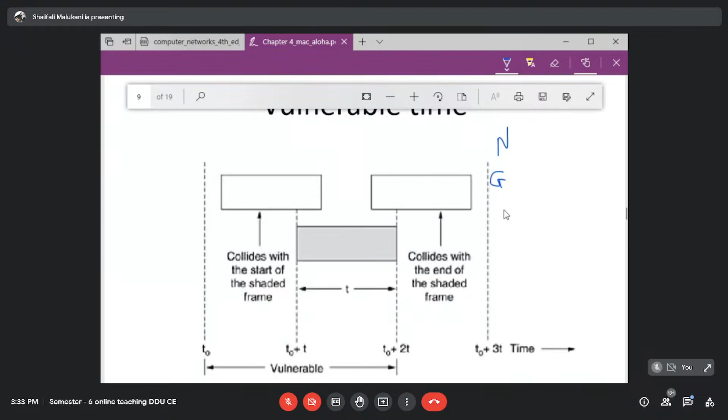So in which duration should no one start transmission? Whenever I am transmitting, at that time no one should start - that is my frame time. Plus, before my frame time, no one should have already been transmitting in the previous time slot. No one should have started transmission before. They can start transmission here so that they can complete here, but not before. After that point, no one else can start. That is what we have already discussed.

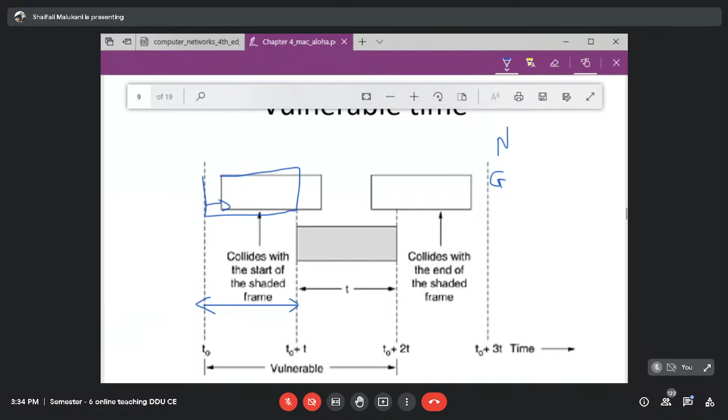So that is vulnerable time. What is vulnerable time? The time in which, if more than one frame is transmitted, they are subject to collision - they will collide. So that is vulnerable time. For my frame, it is 2 frame times. That is also what we have already discussed.

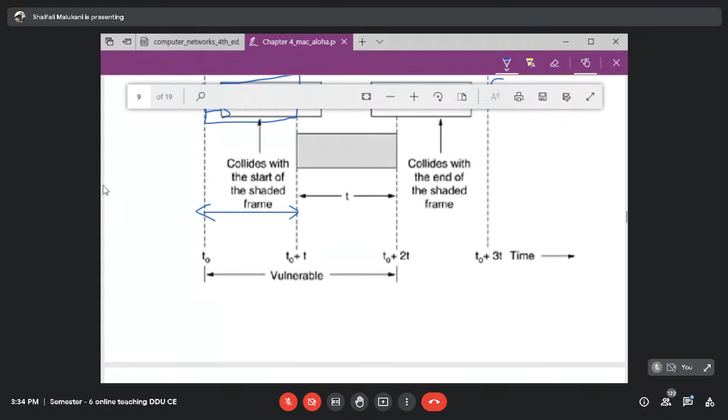We also discussed that we are going to follow Poisson's distribution. What is the meaning of Poisson's distribution? It gives the probability that k frames are generated. This is the distribution that will be followed. In general, this will indicate the mean number of frames that are generated, lambda. So the probability of generating lambda frames is the highest one, and if you take the area under the curve, you will get lambda as your mean. In short, lambda means that on an average, lambda frames per frame time are generated.

These are the frames that are in the network. So this is what we have already discussed, that Poisson's distribution is going to be followed.

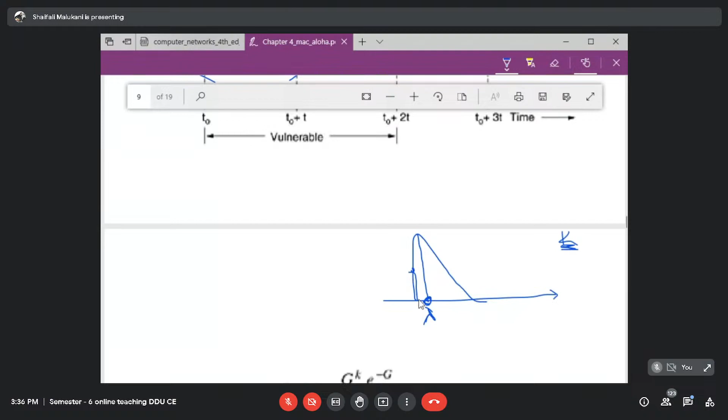So what if I'm taking k - what is the meaning of that? What is the probability that k frames are generated per frame time? So if I'm taking k somewhere here, this will give me Pk. Pk is the probability that k frames are generated per frame time.

Now I want to find out throughput. What is throughput? It is the probability of successfully reaching - the probability that my frame will reach successfully without any collision. That is what is known as throughput. So now what is the value of throughput here? How can you calculate the throughput?

So first of all, I want to find out throughput. Throughput is the number of frames or the amount of data that will reach the destination without collision. Is it clear? That is throughput - successfully, the amount of data that will reach the destination, that is throughput. Are you clear with the definition of throughput? Are you comfortable with the definition of throughput? What is throughput? The amount of data that will reach successfully at the destination. Is it clear?

Okay, so now throughput S is the amount of data that will reach successfully. So now what I need to find, what I need to do...

Suppose my data generated is G. What is the load generated? Load generated is G frames per second, and the probability that it will reach successfully into P success. What is the meaning of this? This much amount of data that is generated, into probability that generated data will reach successfully, so that is going to give me the throughput. This is generated load, and probability that generated load will reach successfully.

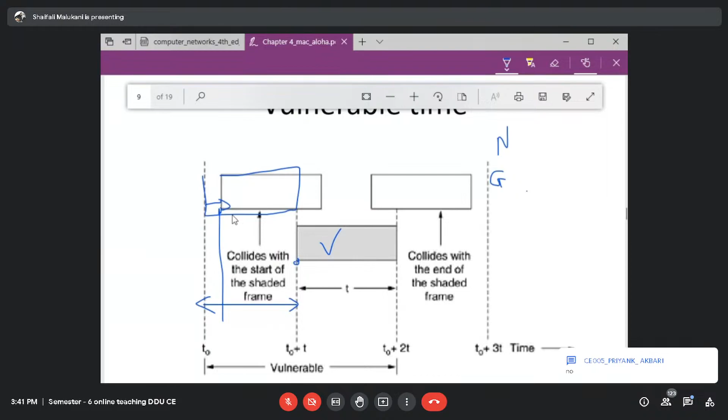Okay, suppose I have data to transmit, if someone starts transmitting at this moment, some frame is there, then can I ensure collision will not happen? So when can I say before my time there should not be any frame, and during my time there should not be any frame? Yes, in the vulnerable time, if there is no frame, that means it is ensured that my generated frame will reach successfully. After that, if someone generates, I will not mind at all, my frame will reach successfully. Are you getting the point?

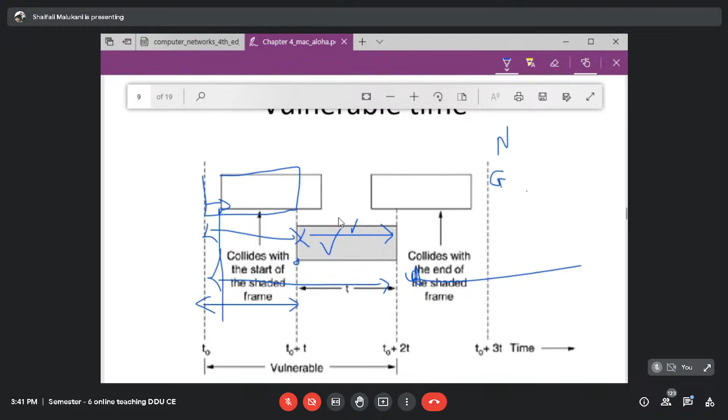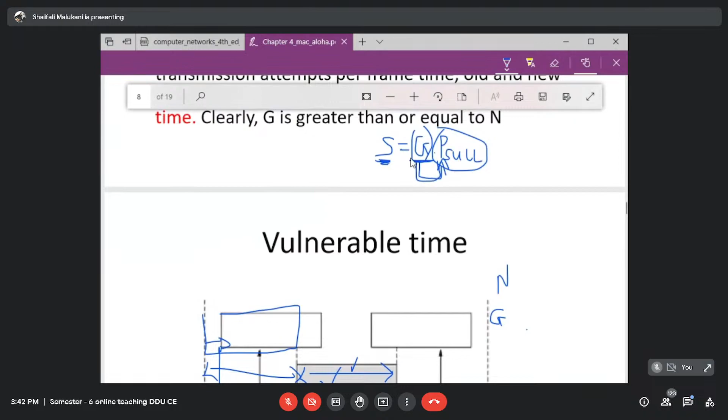After this, if someone generates, it is not going to create any trouble with my frame. But before that, if someone generates, I'm going to collide with them, or during my transmission, if someone generates, then it is going to create trouble. So what should happen? There should not be any frame generated in how much time? If I have a frame to transmit, then there should not be any frame generated, not even transmitted in the channel, there should not be any retransmission attempt even. So there should not be any frame in how much duration? In vulnerable time. What is vulnerable time? How much is the vulnerable time?

How much is the vulnerable time in pure Aloha? This is one frame time, and this is another frame time. So what is vulnerable time?

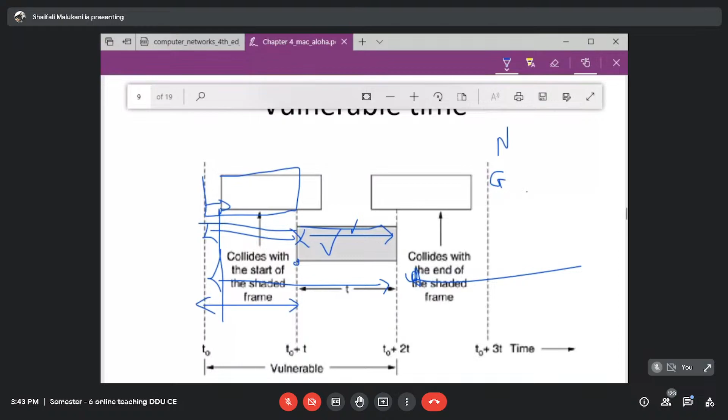So this will be 2 frame time. In 2 frame time, there should not be any frame.

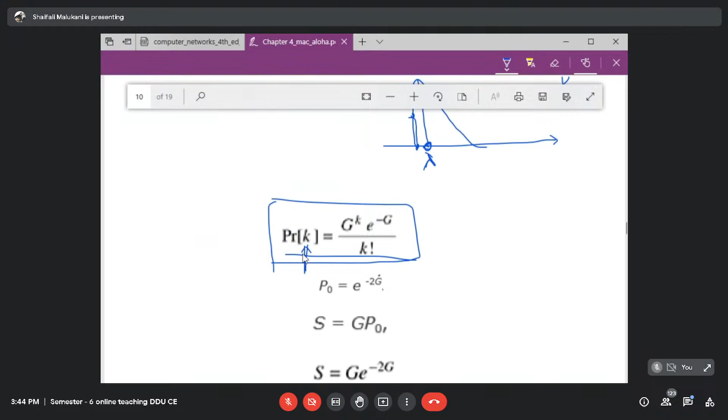So I need to find out what is the probability that no frame is generated in 2 frame time. Now, what I know is Poisson's distribution. What does Poisson's distribution say? What is the probability? I have the equation of probability of generating k frames in 1 frame time. This equation we are not going to prove, this is just Poisson's distribution.

We are not going to prove this, no need to prove it. This is just Poisson's distribution, like we have an equation for the Gaussian distribution. So what is the probability that k frames are generated in 1 frame time?

What is my question? So what is G here? What was G? Do you remember what was G? Total number of frames transmitted in 1 frame time. Absolutely, total number of sent frames, yes, but in how much time? In 1 frame time.

And suppose I am using, so total number of, not total number of, but average number of frames transmitted, average number of total frames transmitted. I hope you are getting it. That is the average value of total number of frames transmitted. Total indicates here new plus retransmissions, but in 1 frame time. And what I was getting here is the probability of transmitting k frames in 1 frame time.

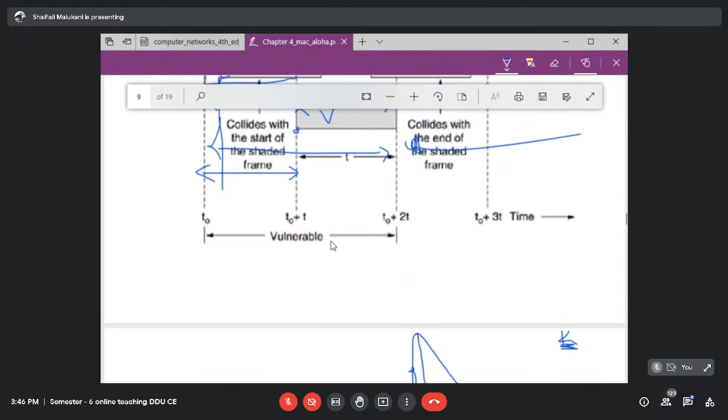So if I substitute k value 0, what I'm going to get is the probability of 0 frames generated, no frame generated, in 1 frame time. But I'm not interested in 1 frame time, I'm interested in 2 frame time. So I want to modify this equation for 2 frame time. In 1 frame time, if g is the average number of frames generated, then in 2 frame time, what will be the average number of frames generated? In 1 frame time, the average number of frames generated is g, so in 2 frame time, what is the average number of frames generated?

2g. Yes, it is going to be 2g. So this equation should be replaced with 2g. Wherever g is there, I'm going to replace with 2g. Then this will give me the probability of generation of k frames in 2 frame time. And then I want to find out k is equal to 0, that is probability of generation of 0 frames in 2 frame time. So can you tell me, substituting k=0 will lead to what value?

It will be 2g raised to k. It will not be like, right, it will be 2g raised to k. It will not be 2 into g raised to k. So what will it be?

2g raised to k. K will be 0. So what will happen to this? It will become 1. What will happen to this?

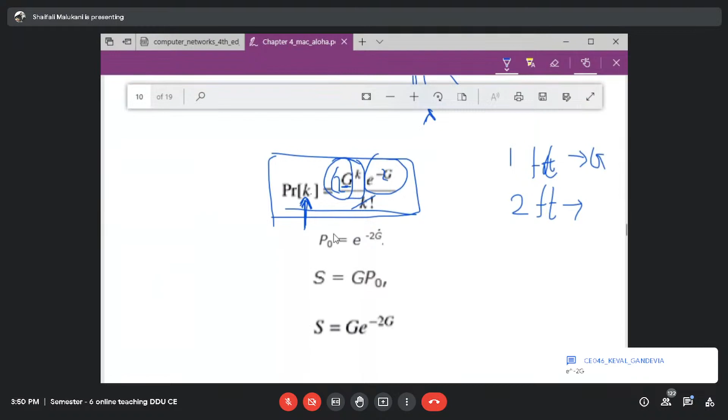Yes, e raised to minus 2g, right? And e raised to minus 2g, that will be substituted here. So what will be throughput?

What will be throughput if I am substituting this? Yes, it will be g into e raised to minus 2g. Okay.

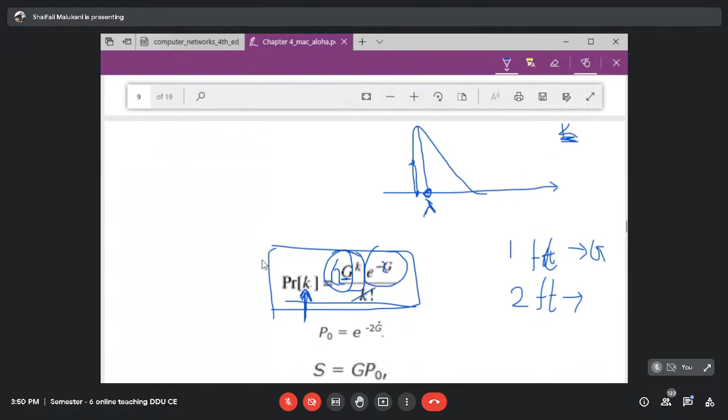And when do you think that throughput will be highest? What is the meaning of that? What should be the value of g for this equation? For which value of g do you think this will be quite high?

See, g is the number of frames generated per frame time. We know that in 2 frame time, if 1 frame is generated totally, whether it is new or retransmission, then I am going to get a collision free version. So throughput will be higher, right?

So someone will say, okay, but you can send it in 3 frame time, if 1 frame is generated, then also there will be no collision. But yes, efficiency will be lesser. So throughput will be comparatively lesser, because it will create less efficiency since you are wasting time there, right?

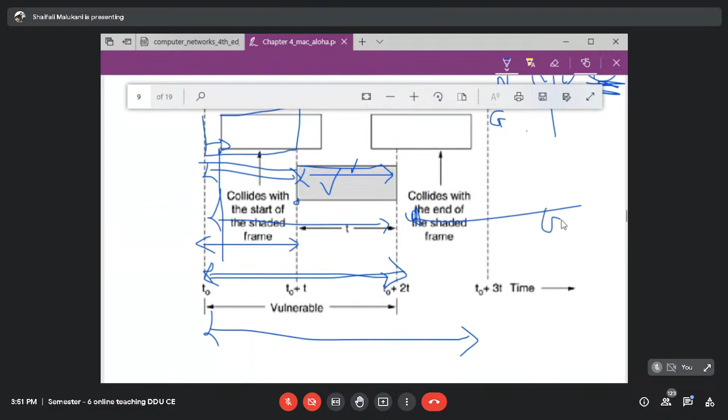So appropriately, when will you get the best throughput? For how many frames per frame time if generated, then you will get the best throughput?

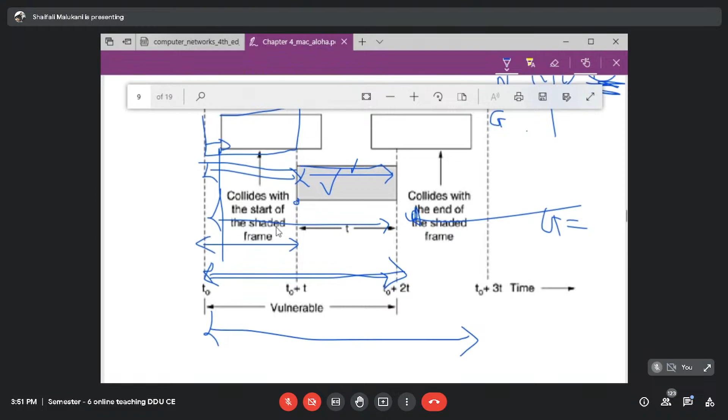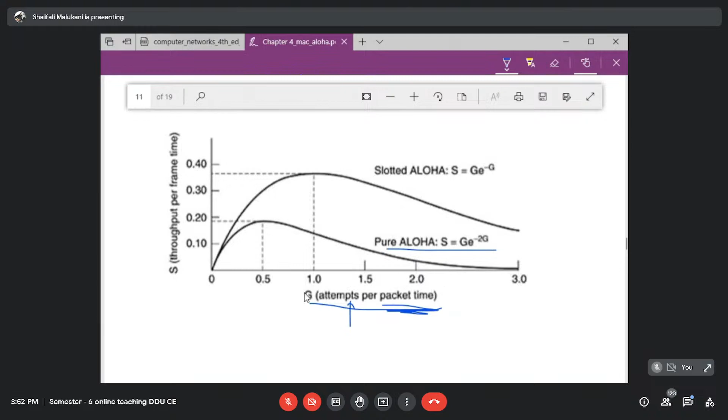Zero point 0.5, yes, it will be 0.5, and that is what can be seen. This is pure Aloha. This is number of packet attempts per packet time. Attempts means number of frames that you are transmitting per frame time, packet time, whatever you call it. So when g becomes 0.5, at that time you are having the highest throughput.

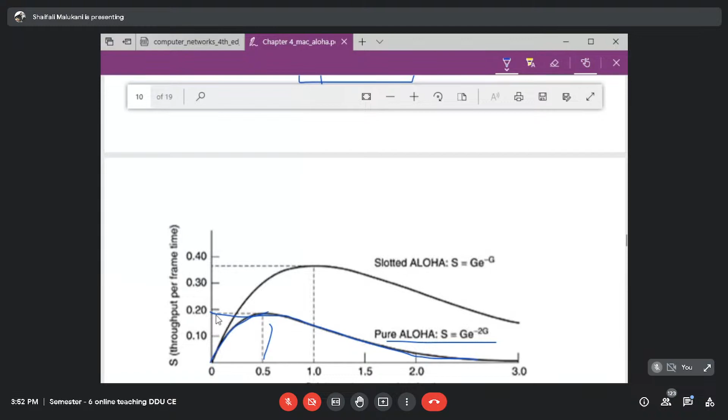And what is that? Well, then it is decreasing again, the reason we have already discussed. So what is the value of the highest throughput at that time? Substitute the value and give me the answer.

So I will substitute the values. What is the significance of having g equal to 0.5? What is the meaning of that? Substitute value of e and get the answer. Priyank, let me know what is the significance of having g value 0.5.

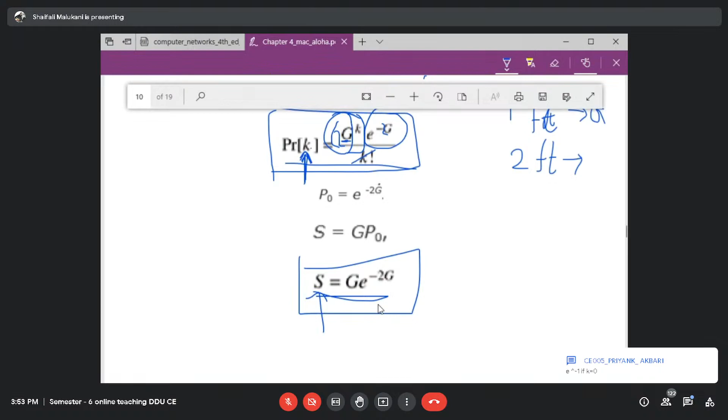What my question is to you: what is the significance of g is equal to 0.5? Meaning, I'm not asking e raised to minus 1 if k is equal to 0. Where are you stuck, Priyank? You can unmute yourself and ask me.

What is the significance of G having 0.5? That is what my question is to you. If you tell, then you will understand automatically. Tell me what is the meaning of G is equal to 0.5. What is the significance of having G value 0.5?

And I think no one is interested in answering what is the maximum throughput. See, I'm not interested if you are not able to answer me the questions.

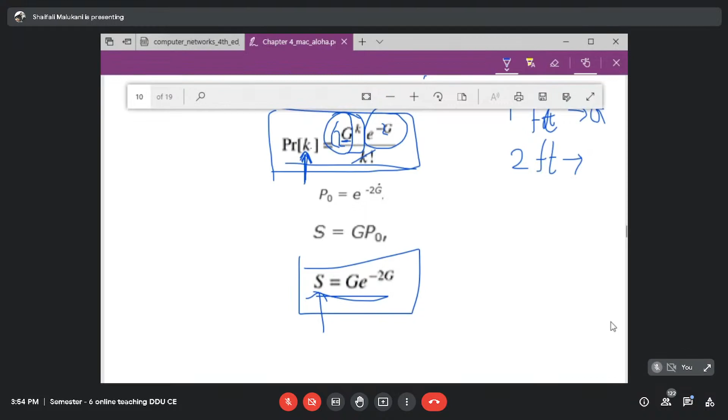And if we are having G value higher than that, that is more frame per frame time transmitted, will it be better? Higher value of G, like G is 1 or G is 2, will it be better? No. Can it be smaller? G be smaller, that means in 3 frame time or in 4 frame time you are transmitting 1 frame. Will it be better?

You are free here to transmit, right? You are free here to transmit, but you are not transmitting, so you are wasting the efficiency. It is not also better, na? It is not optimal, that is true.

Getting it, Priyank? Okay, and yes, answer is 0.184. So what is the meaning of that? Throughput is 0.184. How many percentage is the throughput?

Percentage wise, what is the mean? How many percentage? How many percentage is it? 18.4 percentage. So what is the meaning of that? 18.4 percentage of the frame reaches successfully without collision. So if I send 1,000 frames, 184 frames will reach successfully. That is the meaning. Only 18.4 traffic reaches successfully.

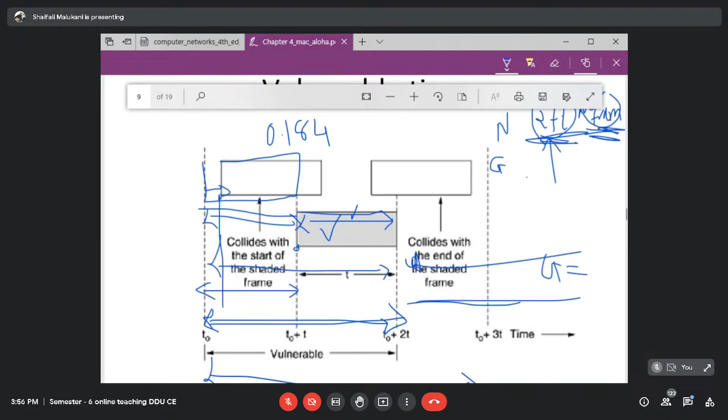So this is, okay, whatever it is. But of course, as soon as you are ready, you are transmitting. You are not having any other policy. This is the simplest aloha scheme that we had here, right? So that is the problem here. What is the problem? That your throughput is very less.

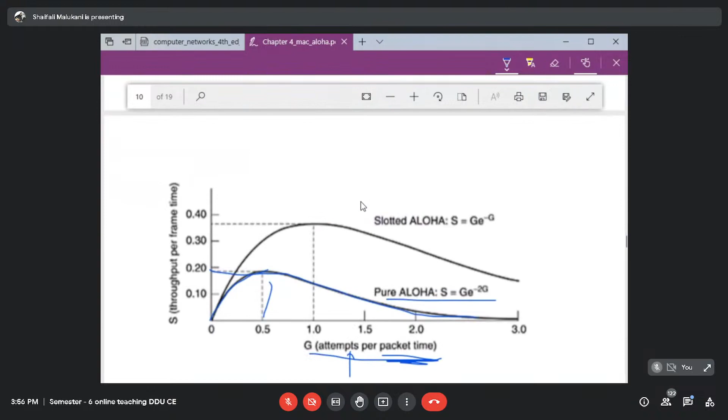We will come to this example, but I'm not sure whether the time will remain or not. So we will take that if time permits. Okay, now we are going to.

So this is what the Aloha was. As soon as I am ready, I will transmit. I will not take care about this time slot, it is a continuous slot. So as soon as I am ready, I will transmit. Okay, so this was the distribution of the frame. Anytime anyone can start.

But now next is the slotted Aloha, frames in slotted Aloha. So here what it is, that if I'm ready, I'm not going to transmit immediately. I will wait for the next slot.

Okay, so suppose this is the slot time. Let us take this as a slot time. So slot time is say 1, this is 2, then this is 3, and this is 4, and this is 5. So at time 1, if I am ready, then I can transmit.

If I become ready, suppose this machine becomes ready at this moment, right? In pure ALOHA, what was happening? It was free to transmit. Okay, but in slotted ALOHA, what will happen? Suppose I am ready at this moment, I cannot transmit. I have to wait for the next slot. My next slot will begin at 2. So this will start transmitting at next slot.

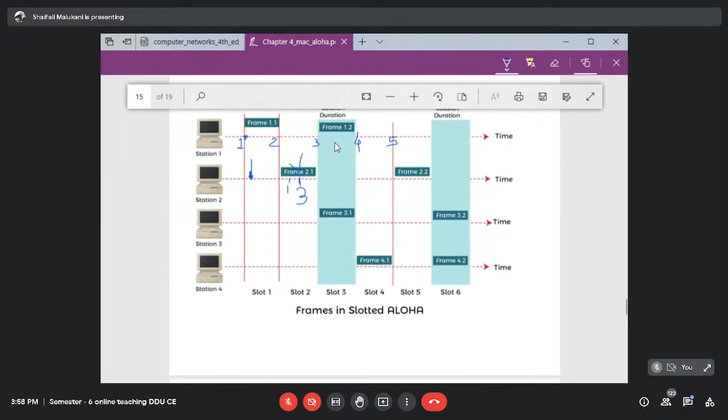I mean, we are not having anything here, we are not listening, we are not having any other policy, we are just waiting for a next slot. So what will happen here? Here it is successful because in my slot only one frame was there. This is successful because in my slot there was only one frame. Here what will happen? Collision will take place, here collision will take place. Okay, fine, now if collision happens, then what should station 1 and station 3 do?

If collision happens, should they retransmit immediately or wait? A random amount of time they will wait and then retransmit. Okay, true, so that is fine.

And so what will happen? Now can you tell me what is vulnerable time here? If in that duration no frame is there other than mine, then my frame will be successful.

Can you tell me what is vulnerable time for slotted Aloha? How it can be 0? What is one frame time? Yes, it will be one frame time. So what will happen in my frame: if in this duration no one transmits, then my frame will reach successfully, right? In one frame time there should be only my frame.

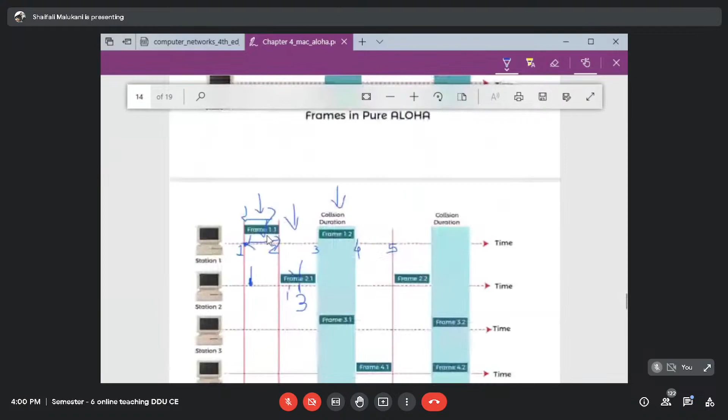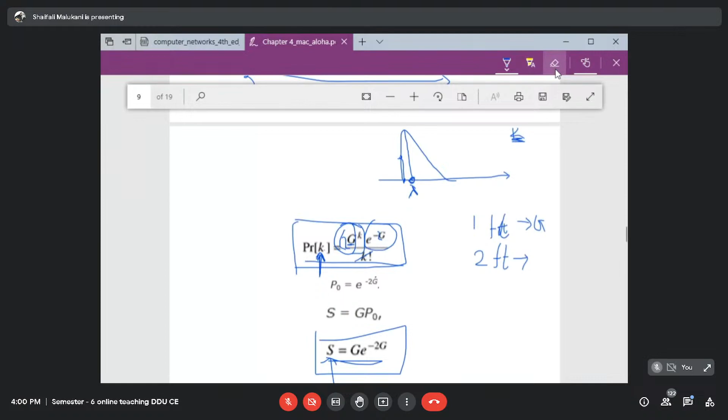So now let us do the same analysis here that we did. Again we are assuming Poisson's distribution, n and g value will be same, just the scheme is different. As soon as you are ready, you will not transmit, you will wait for the next slot. So now I want to find out throughput: s is equal to g into p success.

So what will be p success? How, when will I be successful? If there will be no frame, in how much time? In how much time there should be no frame? Then my frame will be successful? Yes, it will be one frame time.

One frame time. So what is the value of k, and what should I change the value of g here? Should I replace it with 2g? Do I need to change this equation with 2g? No, right? And what should be the value of k then? Because I want to find out for one frame time, this already gives me the equation of probability of generating k frames in one frame time. So I don't need to modify this equation, just I have to substitute k value 0.

Yes, substitute k value 0. What will be the final answer? What is probability of success? Substitute k 0. Yes, it is e raised to minus g.

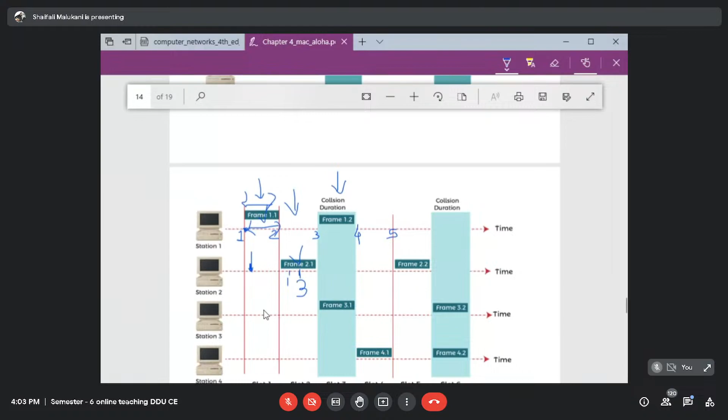What is g? G is, in one frame time, the number of frames generated in one frame time. In Aloha, what happened? In Aloha, in two frame time, there should be only one frame generated. But in this situation, in one frame time, only one frame should be generated. So g value should be 1 for the maximum, to satisfy the vulnerable time condition, and hence to obtain the highest throughput. So g value 1 will give you the highest throughput.

And what is the value of that throughput? 0.37, or you can say 36.8 percentage. Can you see the double throughput here? 36.8 percentage of throughput. So if I'm transmitting 1000 frames, then 368 frames will reach successfully. Okay, that is what the throughput is.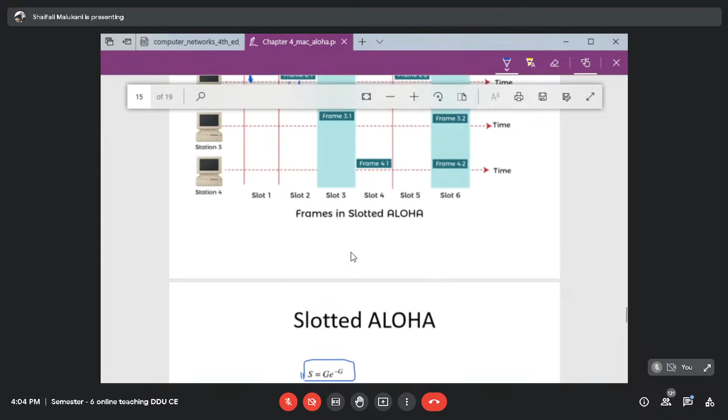One more point is given here: what is the probability that I will be successful in the kth attempt? Find the probability of success in kth attempt. You want to find out that you will be successful after the kth attempt.

What it will be? So when you are successful in the kth attempt, can I say you are unsuccessful in the k minus 1 attempt? So you were unsuccessful for the first attempt, then second attempt, then you reached the k minus 1 attempt, and in the kth attempt you were successful. So what you have to find out, if you want to find the probability of being successful in the kth attempt, that means you have to find out what is...

So now, okay, we will go to this, but can you tell me what is the probability of success here, and what is the probability of being unsuccessful? When will you be successful? We just calculated it. What is the probability of success? What you calculated for Aloha? What was the probability of success? Yes, it was e raised to minus g. So can you tell me what is the probability of being unsuccessful?

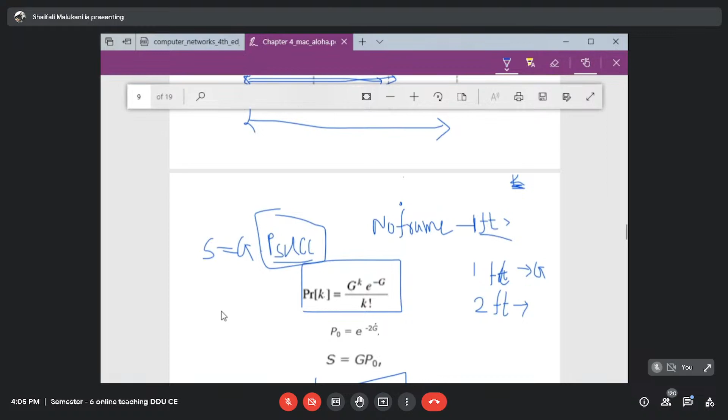What is the probability of being unsuccessful if this is the probability of being successful? Yes, it will be 1 minus e raised to minus g, which is the probability of being unsuccessful.

Suppose you are successful in the third attempt. That means you were unsuccessful in the first attempt, then unsuccessful in the second attempt, and third time you will be successful. So if you want to find the probability of being successful in the third attempt, you have to find the probability that you will be unsuccessful in the first attempt, unsuccessful in the second attempt, and successful in the third attempt. Yes or no?

So can you tell me what will be the equation if I want to find out the probability of being successful in the kth attempt?

Yes, it is going to be, if you are successful in the kth attempt, that means you were unsuccessful k minus 1 times. So you will have the probability of being unsuccessful k minus 1 times. Here you were unsuccessful 2 times, so you can write 1 minus e raised to minus g, squared, or for k minus 1, and into e raised to minus g. So you were successful in the kth attempt, okay, so this is what that probability is.

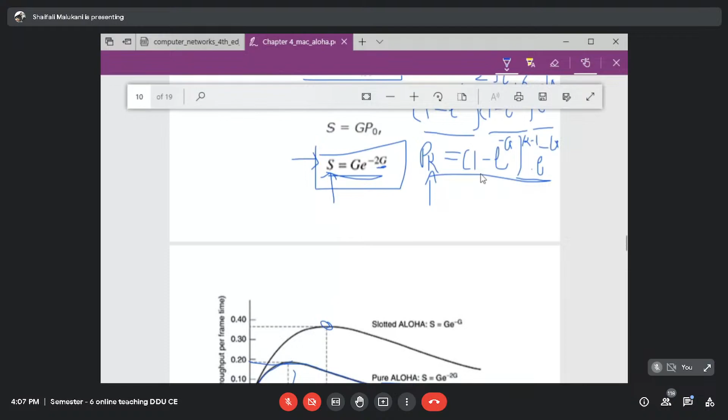Anyone having doubt up to this point? Anyone in case have doubt, please ask. Otherwise, I will go to the next point. Any doubt in this equation?

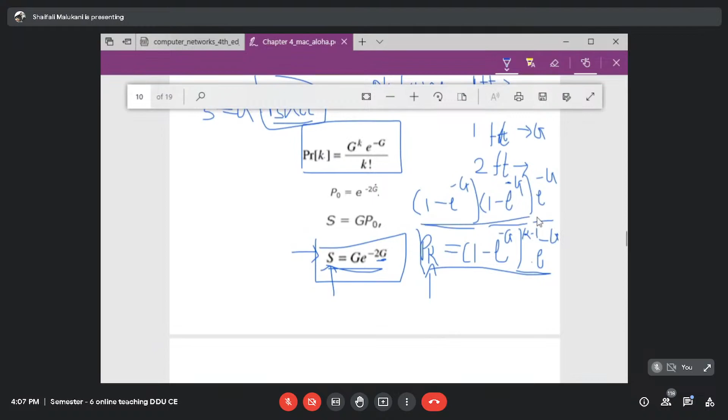And one more equation we should learn. Of course, proof is possible, we are not going to take it. That average number of attempts needed to transmit is e raised to g.

So on average, how many attempts will be required? Like here, you were successful in the kth attempt, right? So on an average, how many attempts does a station need before being successful? That is the expected number of retransmissions, or expected number of transmissions, the average number of transmissions it has to do for being successful, given by this equation.

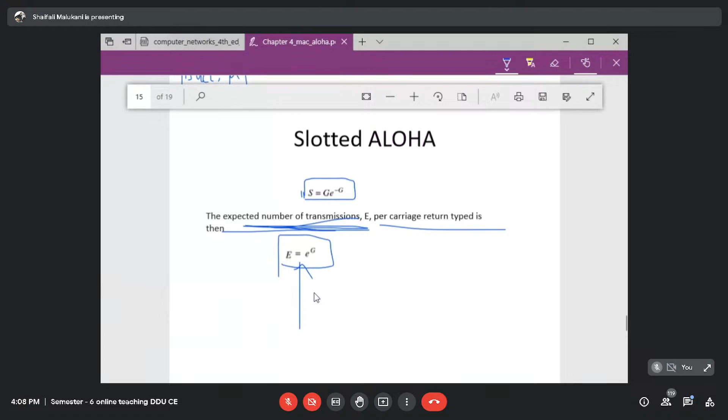So this is what we are not going to prove, it's not difficult, but time is a limitation, so we are not going to go with this. In the textbook it is given, you can explore and understand it. In case of doubt, you can contact me anytime, that's okay.

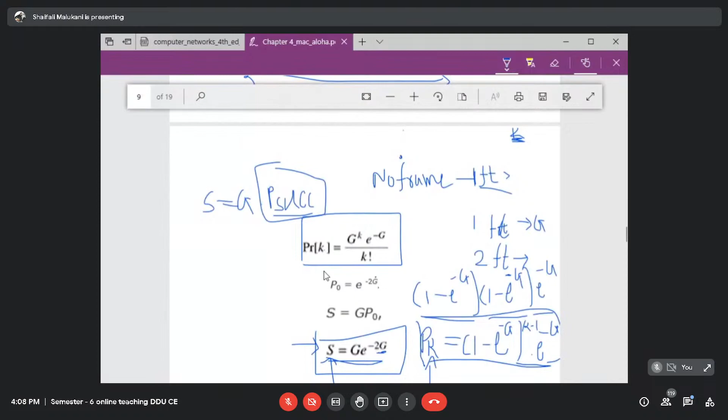Okay, so this is all about slotted ALOHA and ALOHA. Now we are going to take the examples. Any doubt in the concept? Then we can start with the examples.

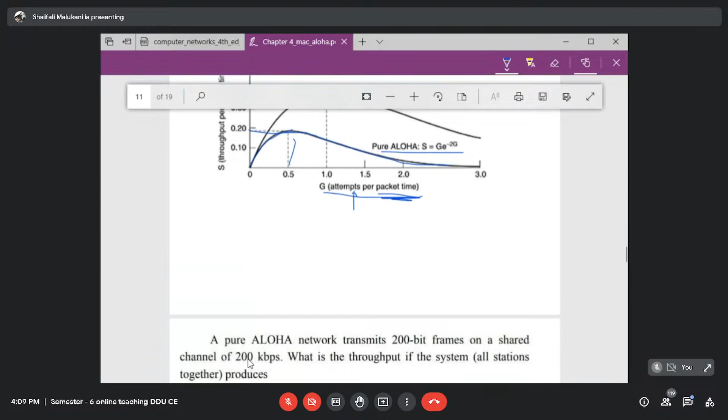Examples, you are going to do it quickly and let me know the quick answers, right? So the question is pure ALOHA, we are doing this example since years, but this was similar, just by changing these values. The question was asked in GATE 2021, right? This PPT, of course, we are following this question. This is given in the textbook itself, right?

So this question is from the book itself, but it was asked in GATE 2021 just by changing some values. So what is the point here, that you can understand the importance of this type of questions, right? Many others are there, you can just go through the ALOHA and slotted ALOHA questions and this multiple medium access control protocol questions. Not many questions are there, and they are very important for the GATE perspective.

Okay, so now tell me here, what is the question, what is given to you? A pure ALOHA network transmits 200 bit frames on a shared channel of 200 kbps. What is the throughput if the system produces?

What is the question to find out? What do you have to find out? Which entity will you find out, and what is the equation for that? S, you have to find out S. And what is the equation for S, for pure ALOHA?

Yes, it is G into e raised to minus 2g. So what is the unknown entity here? This is what I need to find out, right? What I don't know in this is G. So what is G? What was the definition of G? G, I need to find out. What is the definition of G?

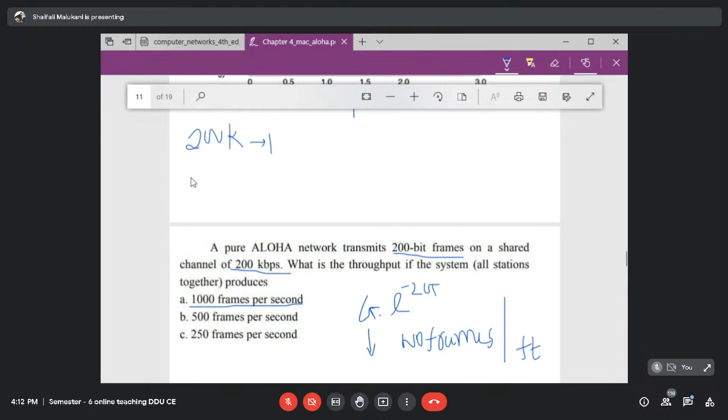Yes, the answer is correct here. So what is already given to us? Frame size is given as 200 bit. So what is given to me: in 1 second I can transmit 200 kilobits. So in how much time can I transmit 200 bits? That is going to give me the time taken to transmit 200 bits - that is one frame time.

Yes or no? So what will it be? Without units, won't it be scary? Amount of time taken to transmit a frame, that is 200 bit - I need to find out what that is.

Are you following this? Are you with me? It will be 1 millisecond. Yes, it will be 0.001 second, that is 1 millisecond. Correct.

So now one frame time is 1 millisecond. So what do I need to find out? Number of frames in 1 millisecond. What I have is number of frames in a second. Can I find out G for the first case? Tell me G for first, second, and third case quickly.

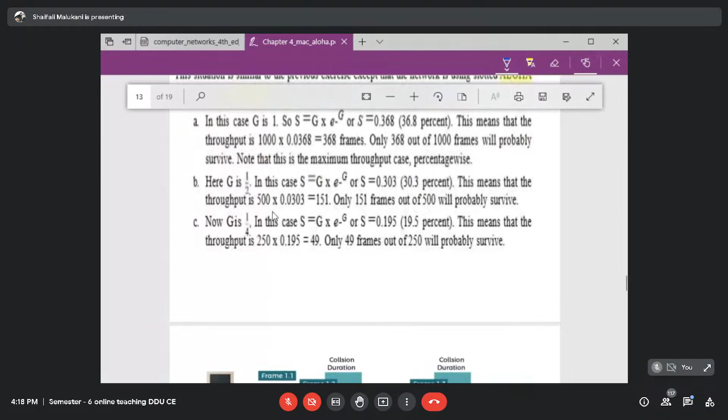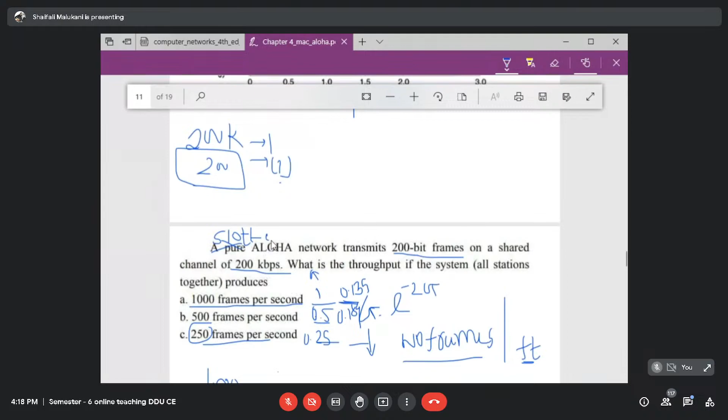This question I have written for the pure aloha solution. I will edit it. Tell me, what will it be for slotted aloha? Suppose it is slotted, change it to slotted. We are not going to do the entire example. For slotted, tell me what will be. Will there be any change in the answer?

So what will be the g value? Will g be same or different? Okay, what is g? Yes, it is number of frames per frame time. So g is going to be same for each.

What will be the difference here in the equation of throughput only, right? So here instead of e raised to minus 2g, you should use e raised to minus g, right? Otherwise g will be same. Logic wise it will remain same, just the equation here will get changed. Let us calculate for the first one.

What will it be for the first one? When g is 1, what will be throughput for g equal to 1 for slotted aloha? What will be the throughput? It is well known, no? G is equal to 1, what is the throughput, maximum throughput? What is that?

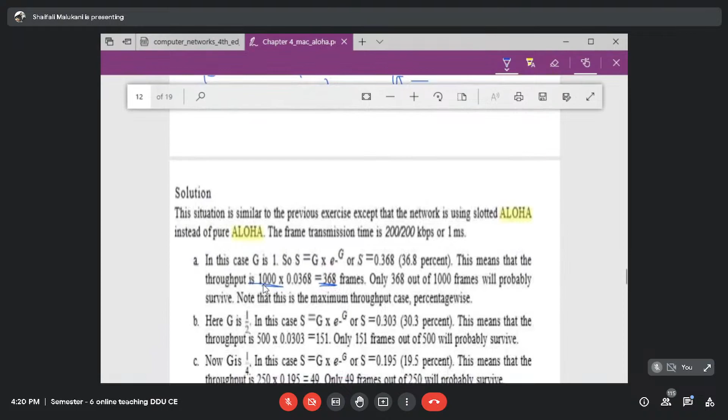Right, so that is what is given, 368 frames will reach out of 1000. But next time, whatever you get, your s value should get multiplied with 500, because the total number of frames transmitted is 500. I'm going to edit this question for both cases, you can calculate this for both slotted and pure. It is okay, right?

Now go for the next question. This is the next question. All right, this is the next question. Solution is not required, just go through the question. What are they asking? Which entity are they asking about?

So how many stations are there? How many terminals are competing with each other? What is n, how many stations are competing for the channel? 1,000 stations are there, and each station is generating how many requests on average per hour? 36. So per hour, totally how many requests are generated? One station only generates 36 requests, so yes, it will be 36,000 requests per hour generated.

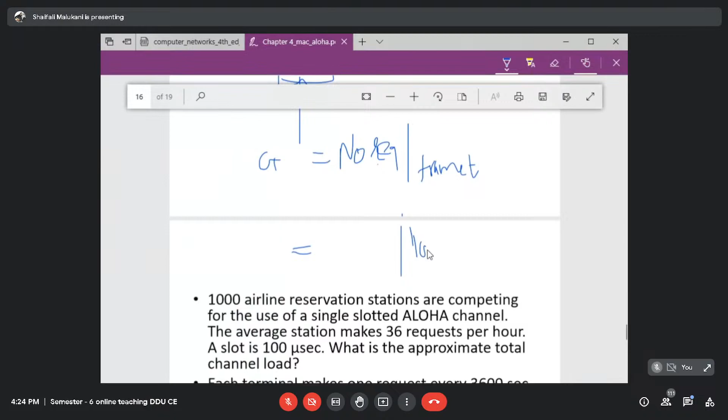So what we need to find out is how many requests per 100 microseconds. Are you clear that 100 microsecond will be my frame time? And what I have is 36,000 requests per hour. So I just need to do some conversions. This already I have, I need to convert it for this only. Do it quickly, let me know the answer, G.

36,000 requests per hour. No. G is 100, is that your point? No, 100 frames per 100 microsecond.

Then, I mean, throughput will be, on the ground, how can you send so many frames per frame time? Think, don't just calculate, see this is very simple. What do you need to do? Okay, tell me how many requests per second, Prince? How many requests per second?

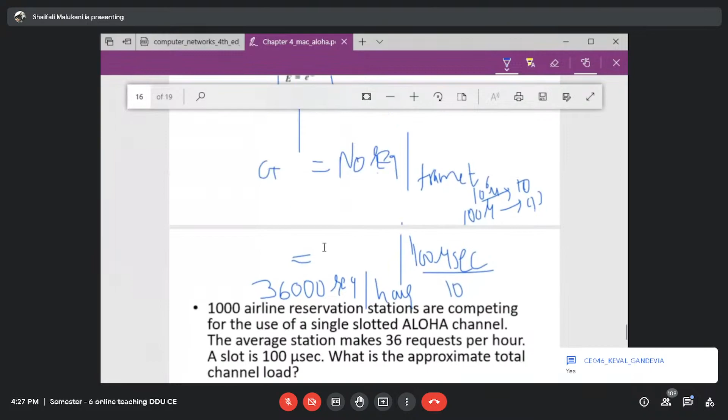This is just, logic wise nothing new, just it is some conversion process, right? Nothing else. This is the new one. Do this.

Okay, now first, in first question, what is, which entity, which variable is to find? G, first is G. Second is S. Third, how will you say the channel is overloaded or underloaded?

Use your logic. Here we don't go and try to think, okay, we have which equations we have studied. No. If it is slotted aloha, when will you think about what slotted aloha is? In one slot, at every beginning of slot, I can transmit, and if collision occurs, I will wait for a random amount of time and retransmit. When will you think that my channel is properly loaded, overloaded, underloaded? When will you think that my channel is overloaded in slotted aloha? I told you, don't go with your equations, you will not reach the correct conclusion. Go with your logic. What I ask, significance wise, tell me in which situation you will say that my channel is overloaded or underloaded.

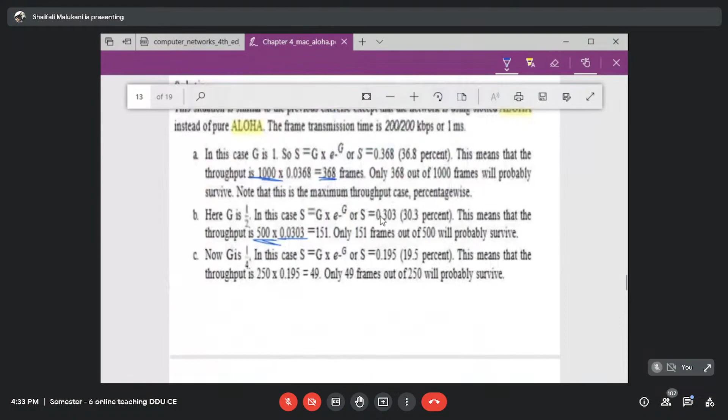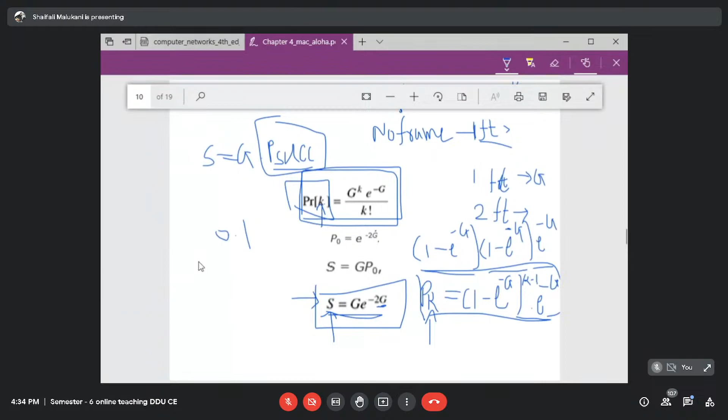K is 0 and it will take 0, and the probability is 0.1, right? Are you comfortable with this mapping? Are you getting the idea here? Should I explain this or are you clear with this?

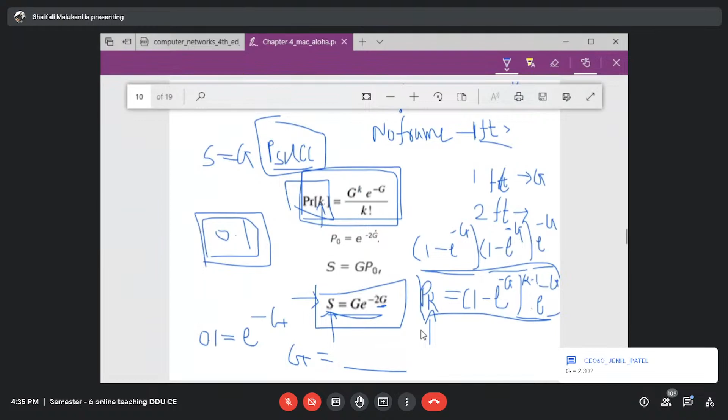Okay, so k value is 0 here, so 0.1 is equal to what? 0.1 is equal to e raised to minus g, right? So what is g then? Yes, it is 2.30. Yes, g is 2.30.

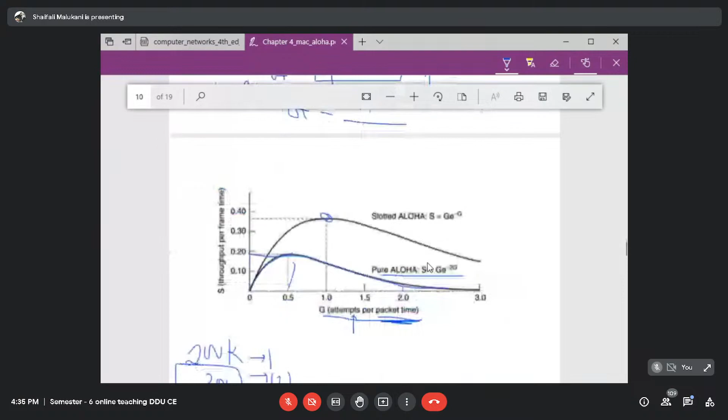G is 2.30. So according to that, what will be your throughput? This will be 2.30. Because e raised to minus g is equal to 0.1, then you simplify this by taking ln, or you can take ln of 0.1 and use a minus sign. So g will be 2.3.

So what will be s then? Is it 0.23? Yes, it is 0.23. And is it overloaded or underloaded? Yes, it is overloaded. Okay, so this is all about, and you can see that throughput is less than the maximum throughput possible. It is overloaded. So this is all about different examples of Aloha and slotted Aloha.

Are you clear with all the concepts? See, many other possibilities are there, right? We have tried to cover the different types, but again, many others are there. If time will permit in future we will consider more, but I don't think the time will permit. So you start doing on your side, and wherever you get stuck, you can ask me anytime. Okay, so I'm concluding the Aloha, slotted Aloha part here.

Any doubt, please ask right now, or even you can ask me later. But start practicing examples from unsolved Tanenbaum, and of course many other GATE previous year questions you can also solve. So generally, in every two or three years, one question from MAC protocols comes, right? So you should not ignore this.

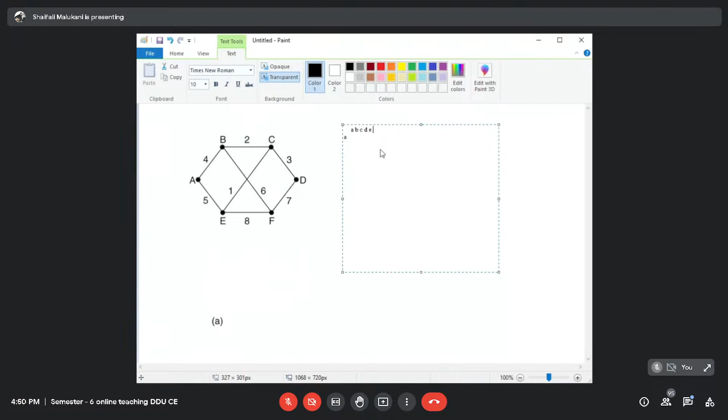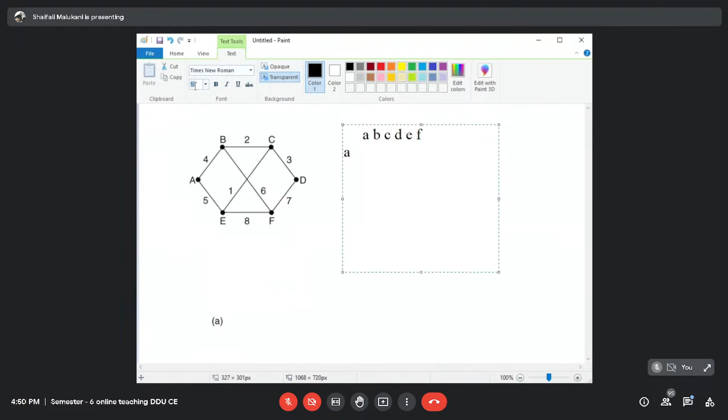Okay, so suppose this is the network, right? If I was aware about this graph, that's good. Otherwise, I will share the link state packet and I will create this type of graph. And as an input, what I'm going to take is how A is connected with all other nodes, like with B, with C, with D, and E and F. This type of matrix, and then same thing we will repeat for B, C, D, and E and F. This type of matrix we will have, right? And this will give me the idea about this graph. So I think everyone is clear up to this point.

Now the question is, finally I will find out the solution, right? And I need to assume which node I am. Suppose in this graph I am the particular one, right? Suppose I am this node, suppose I am the B node, right? So what should be the entries in my routing table? For which nodes should I have the entries here? For which network address should I have the entries? For which IP address should I have the entries? That means for which nodes in the network should I know the shortest path. From B, is it sufficient to find out for F? From B, to which nodes am I going to find?

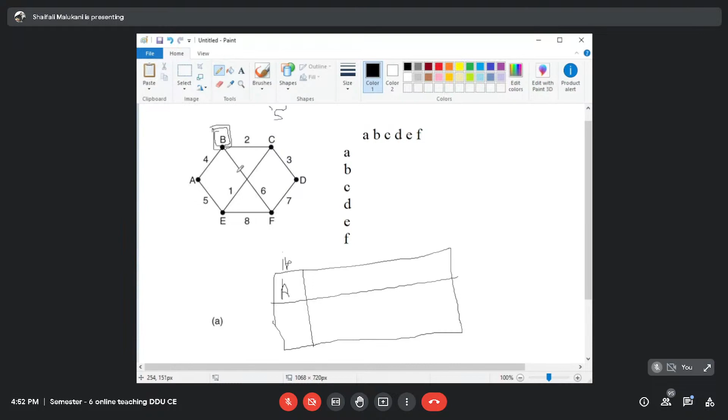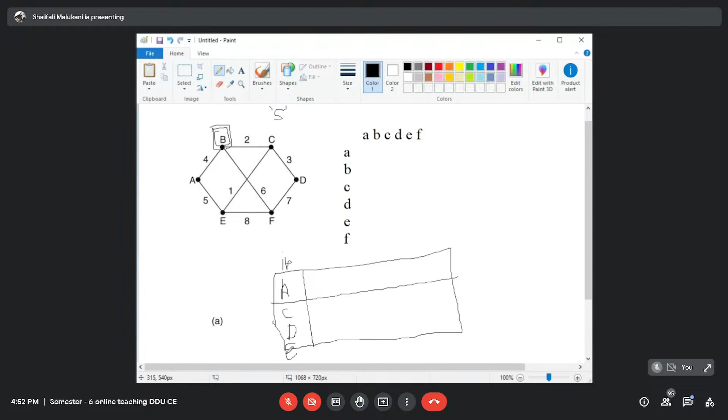I have to first understand who am I, who is the source, right? So you will decide the source first. Suppose you are deciding that B is the source, then your output should be address to A, then address to C, address to D, address to E, and address to F. Why? Because as a router you don't know whom you will need at which time. So the IP address field is clear to you - which address will come, all other nodes are going to come.

Are you clear with it? Okay, mask part, right now we are not making it complicated, let us keep it simple. Routing part is more important than the forwarding part, so right now focusing on the routing part. So let us go with the next hop.

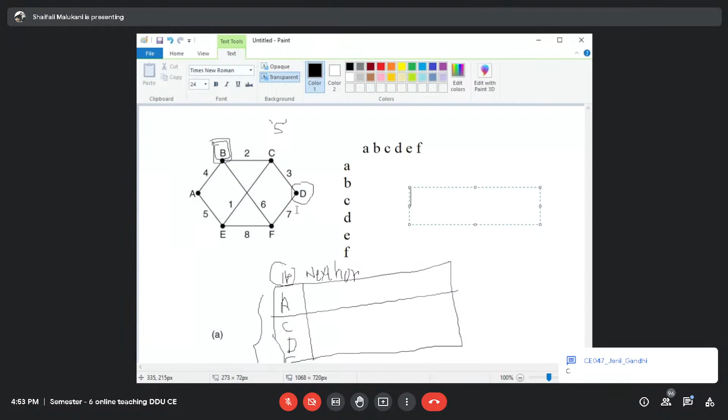Now can you tell me, suppose I am finding path to D from B. What is actually the correct answer? Path to D from B, what is the correct answer? Yes, the path is B, C, D. Suppose it is the answer.

Suppose we have one more node somewhere, A. Why A is not the source? No, B is the source. We have assumed that B is the source, so it will be B, C, D. Suppose we have one more node here, for simplicity I am explaining.

For another case, suppose I am having X node here, and to reach that X node we have a path like this. Suppose for the entry of X, this is the path. What should be my next hop for this entry X? Suppose the path to reach X is B, C, D, and X. What should be my next hop?

Yes, it should be C. It should not be D. So generally what you do when you find out the shortest path to X, what do you find? The parent node - that is the general practice, that is how you generally practice.

But what we need here is this node. Suppose it is X, then Y, then P, whatever it is, but I need this one. Understood?

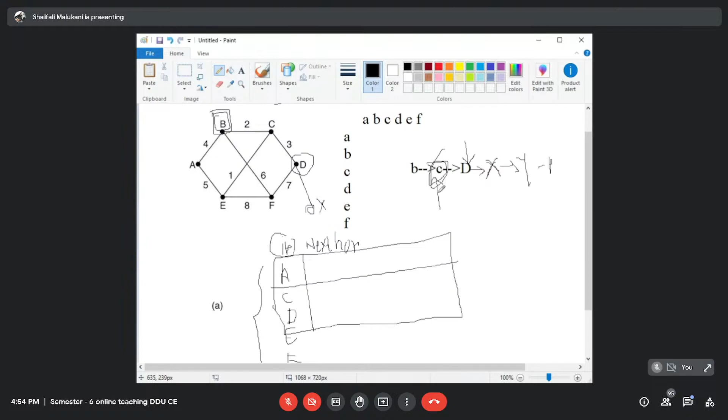So that next hop part you are going to take care of. Additionally, what I need is that entire path you are going to write here - entire path you will mention. I want to preserve all the nodes in the path. Suppose I need this path, so whatever the shortest path is, in my requirement the entire path should be preserved. Is it clear?

Up to this, is everyone clear what the requirement is? Are you clear with the requirements?

Great. Now the next requirement is, should your algorithm be specific for B only? Whatever you implement, the same code, if I run for C, should it run or not? Whatever code - the router will just be a different machine - it should run, right?

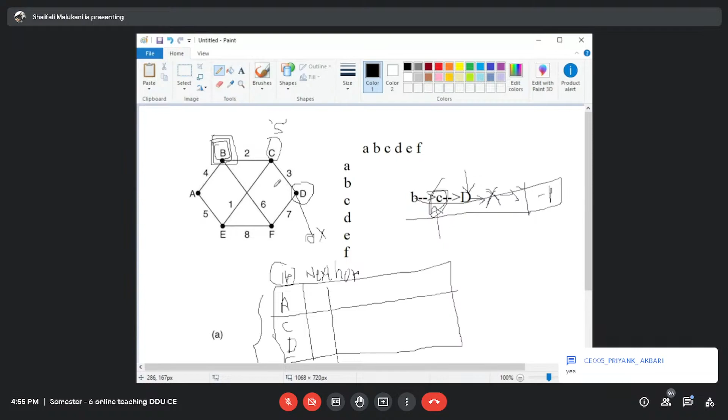So that implementation will be made by asking the source to the user itself. So whenever you run it for C, you are going to change the source to C, and then it should work. So your implementation should ask the source first - who is the source? It should ask the graph, of course it is required, right?

And third, it should not ask, but it should generate the output for - this is the input, source is the input, and this is the input. Then what will output one be? Output one is that for all the routers, for all other machines in the path, I should be able to find out the next hop

and the interface, right? And the interface - but right now let us keep it next hop. Interface will, for the immediate one there will be interface, otherwise there will be next hop itself. But let us not complicate it. For all of the routers, it should be able to find out the next hop, plus it should be able to find out the path, and of course, what? Cost.

What is that shortest cost? Cost is also one of the parameters of a routing table. So output should be this type of table in which, for all the routers, next hop value, path to that router, and cost to that router should be the output.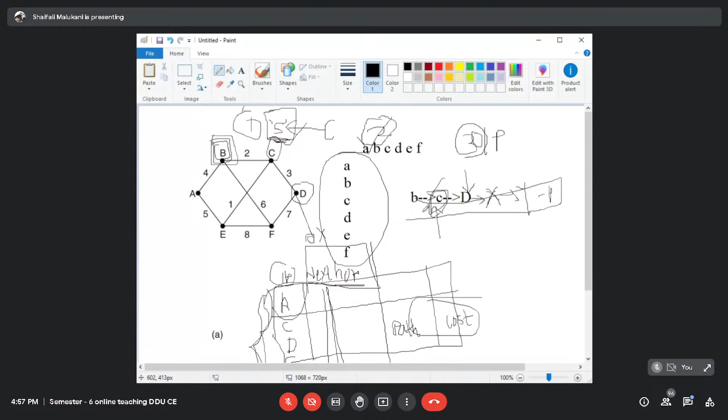Is it clear, everyone? And what should be the input? Input should be the graph with more than 8 nodes. Whatever graph you want to take, but the input must include more than 8 nodes, or at least 8 nodes, right? Start, start implementing.

You tell me what it should be - cost to next hop or cost to destination? In the routing table, what do we include?

Routing table includes what? It says that if you want to reach X, this will be the cost, and this will be the next hop. Why will this cost indicate from X to the next hop?

What your logic says is, if I want to reach X, who will be my next hop? What will be my cost? What will be my path? Getting the idea?

Are you getting it, Priyank? So what will be the cost? Cost to what?

A, B are the immediate ones, so it will be the next hop itself, there itself. Whether it is for the next hop or for the destination, they are the same because it is the one. If you want to reach A only, then there is no next hop, it is itself a destination. But if you want to reach...

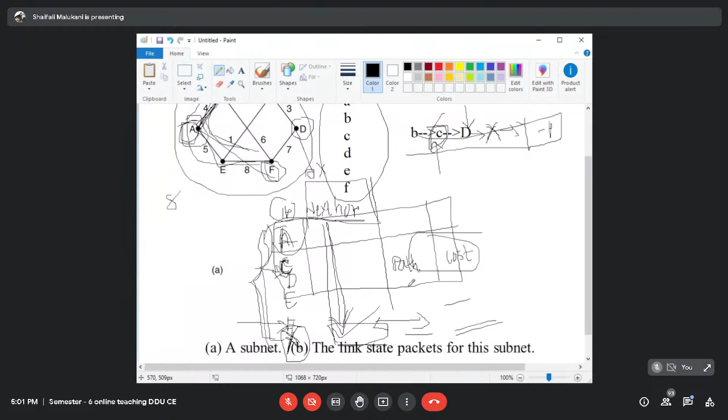Next hop is what? Next hop is the immediate node from that IP.

And cost is what? Suppose from B I am considering F, and I assume this is the path — from B to F, suppose this is the path I'm following. Assume that. Okay, yes ma'am.

So what will be my next hop for this path? A. And what will be the cost for this path?

For the whole path, or for just the immediate node — it is not required. See, the cost to reach F, the cost to reach A will be mentioned here. From B, the cost to reach A will be mentioned here. The shortest cost possible from B to A will be mentioned here. From B to E will be mentioned here. The shortest path and cost to reach E will be mentioned here.

The shortest — got it? Yes ma'am, got it, understood. Uh-huh.

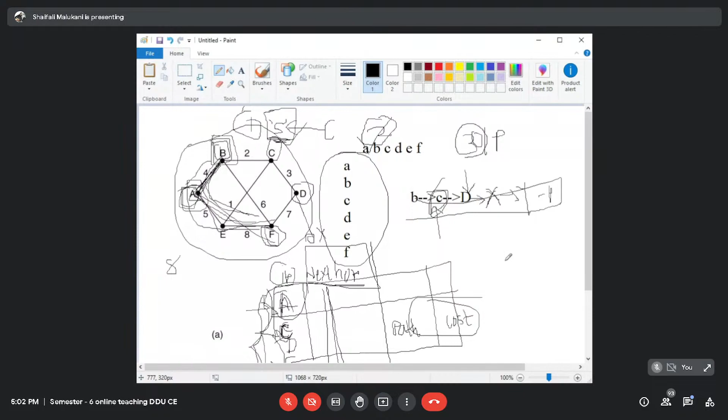So are you working on that? Have you started, all of you? Report to me as soon as it is completed.

That is, C is preferable. You can go with C++, but do not use too much — just assume that you have very low functionalities available. Okay, C++ is fine.

Okay fine, but assume that you don't use very many available functionalities. Start the implementation as if you don't have any facility, so that logic-wise you will be more clear. That's why. Okay.

You can use whatever structure suits the graph, right? You can use it, and if it's a better implementation, it's okay. But my restriction is that you should not use inbuilt libraries which directly compute something for you. Otherwise, representation-wise, you can use anything. That's okay.